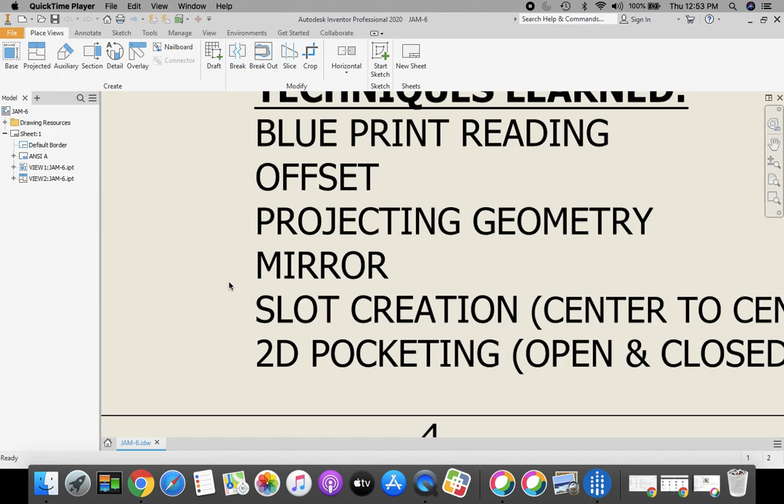out in front of it and a pocket in the middle. The thing that's going to be new for us is if you can kind of draw an imaginary line right down the middle of this part, can you see how the left side matches the right side? So we're going to introduce you to a new tool called Mirror. Also, something new for us is going to be this slot creation on how to create a slot. And all of that is talked about down here in our techniques that we're talking and learning about today.

We're also going to add projecting geometry in there. So to begin, we're going to start with a square that is 4 inches by 4 inches, and we're going to extrude it back 0.25. Let's go to Inventor.

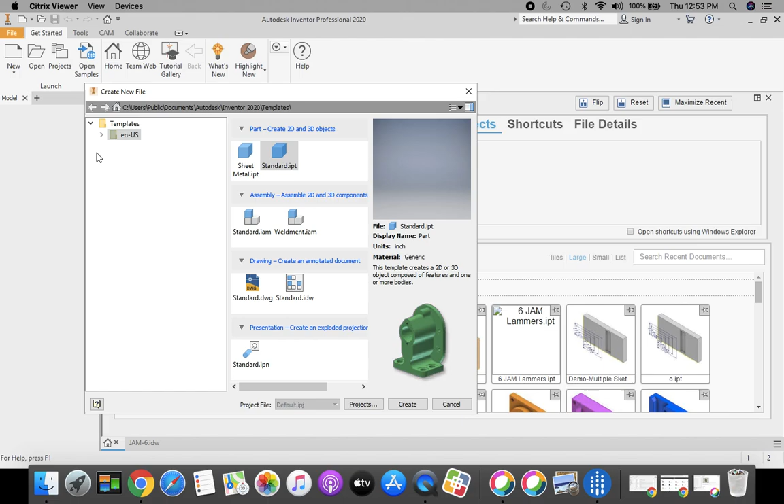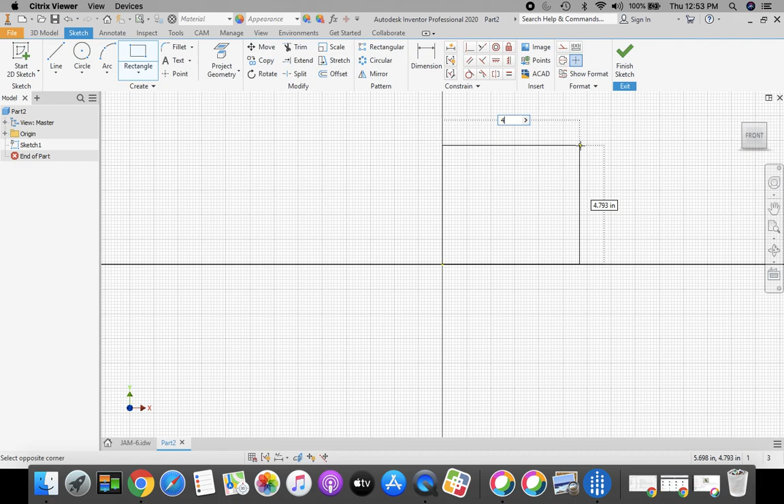Select New from the ribbon bar at the top, Standard IPT, and click Create. Take a 2D sketch, place it on our XY plane, click Front in your World View Cube to zoom all. Then we're going to choose our rectangle tool from the top, lock onto your origin, and sketch to the upper right hand quadrant. The horizontal dimension is 4, press the Tab key. The vertical dimension is 4, then press Enter on the keyboard. Green check mark, finish sketch.

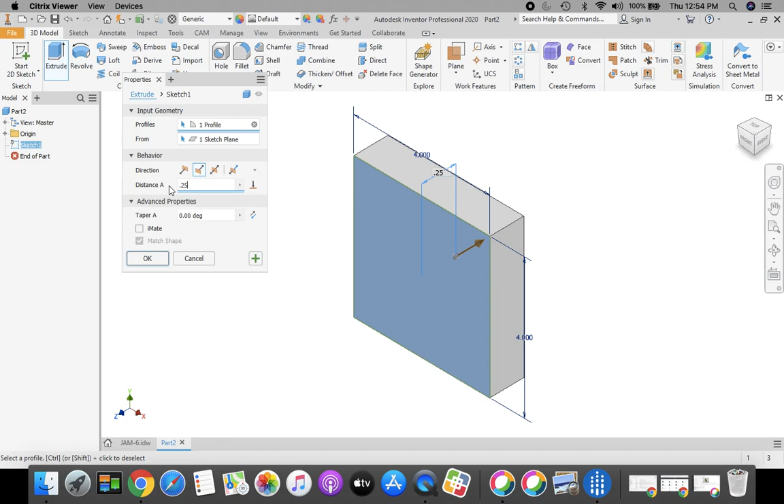Go home. And now we're going to take and extrude that 1/4 inch. We want that to go in direction 2, the flip direction. And we want to enter in 0.25 for my distance. And then select OK.

Wonderful. Next, let's take a look at our part. The first thing that we're going to do now for this triangle is we're going to take and make this angular line that goes from the midpoint of the square to the lower left-hand corner, and then we're going to mirror it over on the other side.

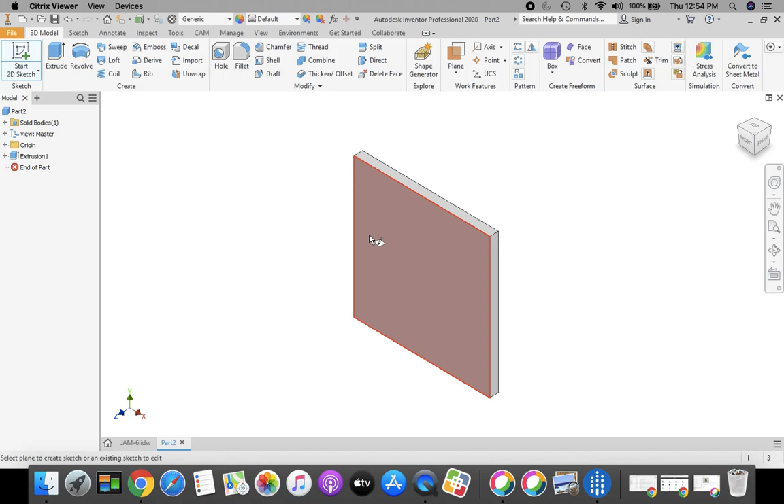So we're going to take a 2D sketch, place this on our front view. And in order to make this work, what we want to do is we're going to sketch some geometry on here. But first, we want to take and project the geometry from our square that's below this sketch onto this sketch.

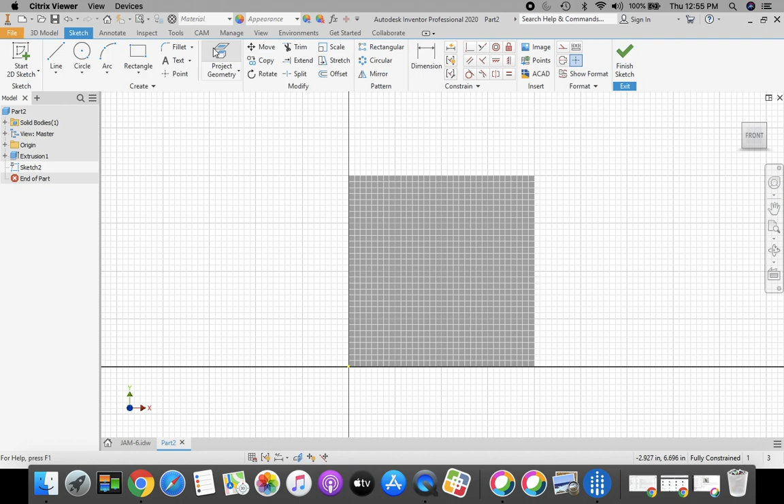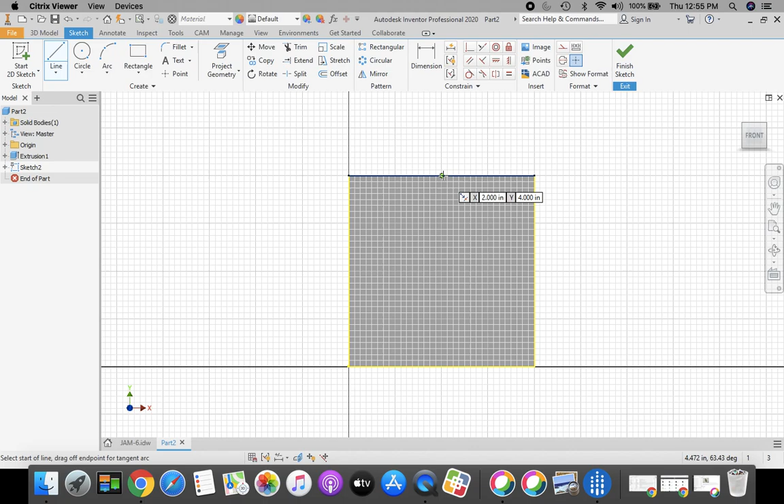So I'm going to click Project Geometry, and I want to select my part. When it turns red, click. And you can see that we did it right because it's now outlined in yellow. Then we're going to grab our line tool from the top ribbon bar, come up to the top of my part, and I want to slide my mouse along that top line, and when it locks on to the midpoint, you'll know it does because it turns into a green dot. Once it does, click, and then we're going to stretch a line to the bottom left-hand corner. Once you get a green dot down there, click to select.

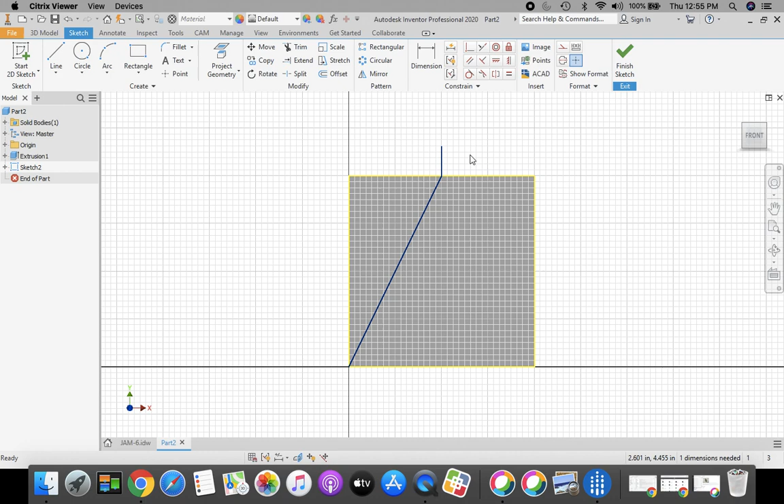Press the Escape key. The next thing that we need to do is we need to draw a construction line. So we're going to come back up to that midpoint at the top, click, make a line straight up in the air. Make sure that it's straight. The length of this line does not matter. Click, press Escape. So that's our construction line right there.

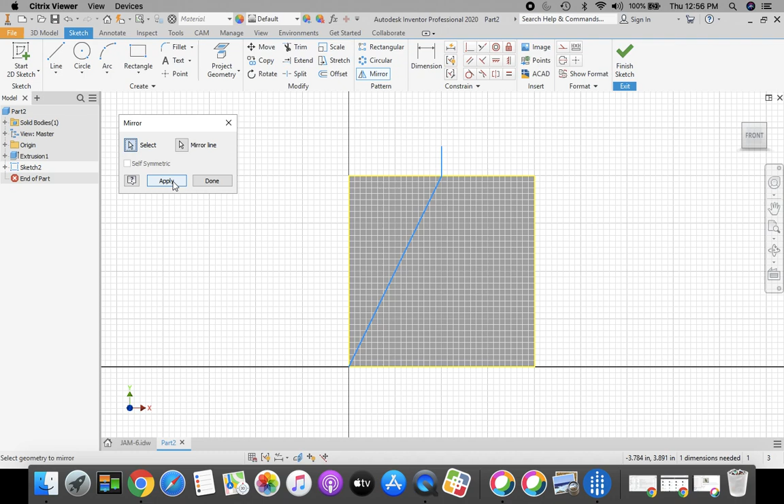Now we're going to select our Mirror command. It's right next to Dimension and below Rectangular and Circular Pattern. Right here, Mirror. The first thing it wants me to do is select what geometry I want to mirror, and I'm going to mirror this angular line. I'm going to switch over to my Mirror Line Pick tool, this one here, and it wants me to choose the line I want it to mirror around. So I'm going to select that construction line. Once I have done those two things, click Apply. And see how that flips it over there, nice and easy? Click Done.

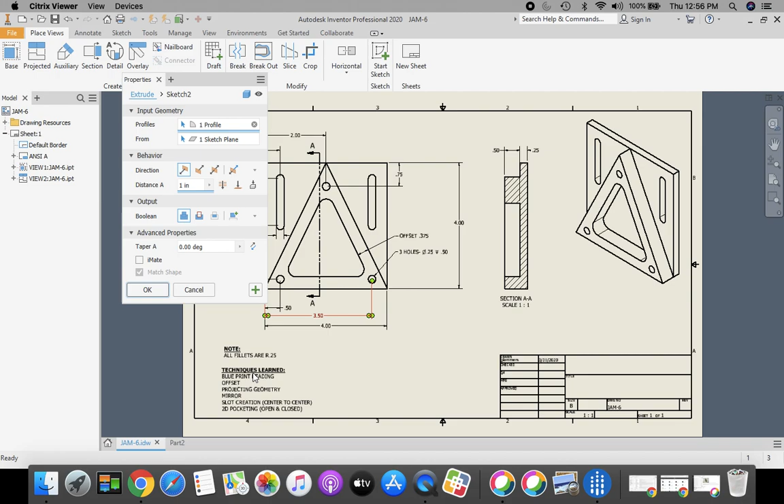Next, let's green check mark Finish Sketch. Go up to the top ribbon bar, we're going to extrude, and I want to select this middle triangle to extrude, and I'm going to take and extrude this a distance of, take a look at our drawing here, you can see that this area that's extruded is 0.5, a half inch. Going back to my part, I'm going to change my distance to 0.5 and click OK.

Next, what we're going to do is we're going to make this pocket in the middle that has these fillets in it at 0.25. You can see that in a note down here. Then we're going to drill these holes, and then we're going to talk about those slots.

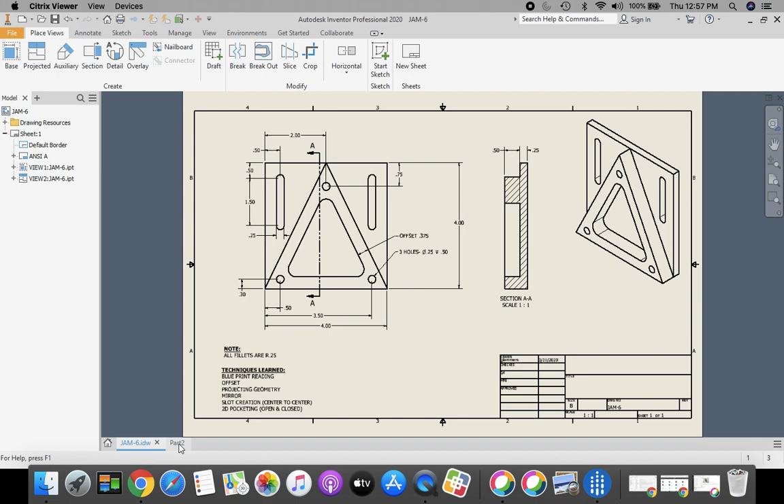The first thing I want to do is take a 2D sketch, place it on the top of my triangle, and go home.

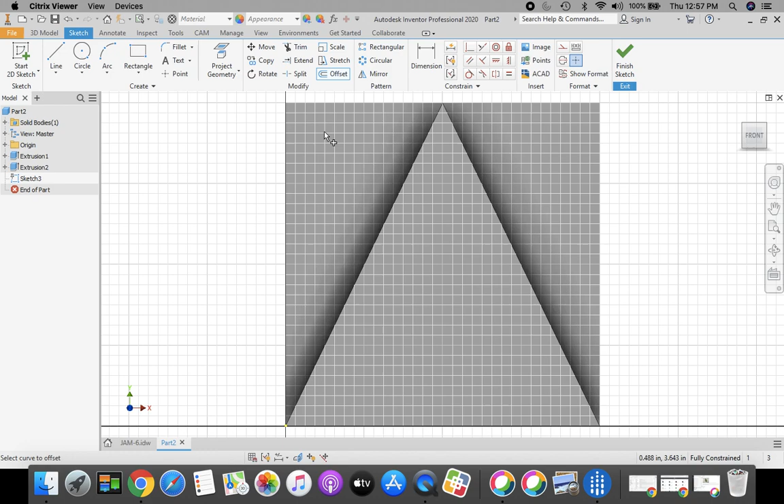Now I want to offset the outside edge of this triangle. However, when I click offset, do you see how nothing highlights? That's the same problem we were going to have with that midpoint in our first sketch. So what I want to do first is, instead of offset, project my geometry.

I'm going to come over and select my middle triangle, click, and now go to offset. When I click on the edge of that, you see how it all highlights red? Click and bring your cursor to the inside of your screen. This offset distance is 0.375, and press enter on the keyboard.

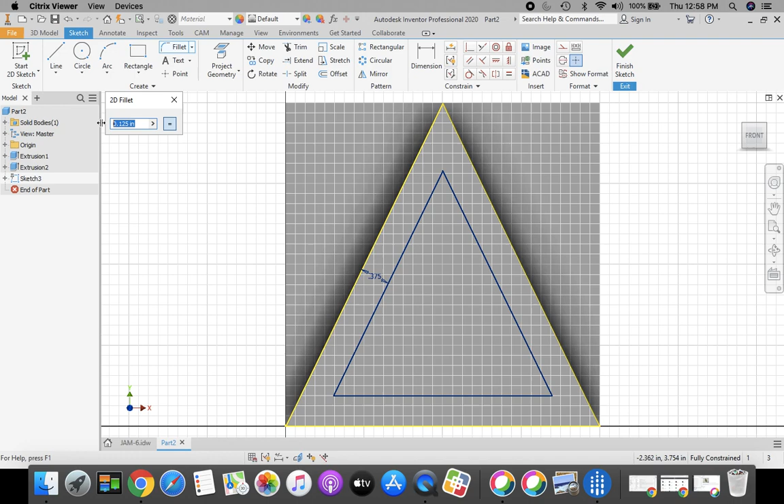The next thing that we need to add are those fillets. So we're going to come up to the top to our ribbon bar, select fillet. Our fillet radius is 0.25. Enter that in up here. And then we're going to fillet the top, the right, and the left corners of that triangle. When you're finished with that, X out of your fillet tool, and let's green check mark finish sketch.

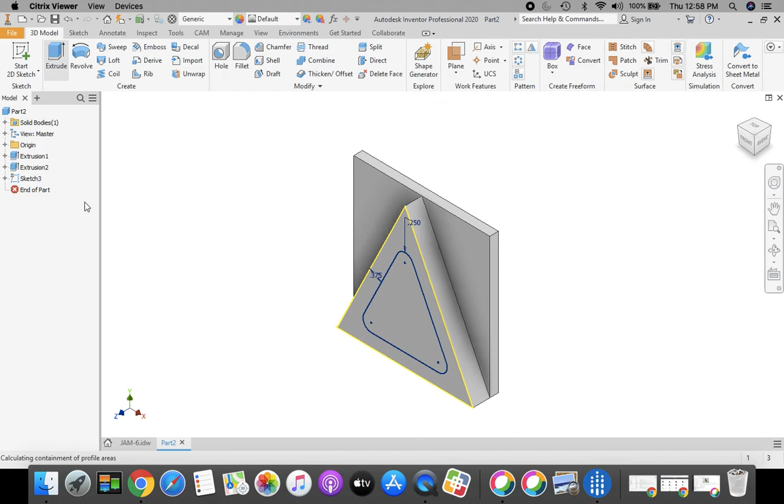Now we're going to take and extrude. I want to select that middle triangle that we just drew, and I want to extrude it, cut, and I want that distance to be a half inch, 0.5, and click OK.

Okay, next let's take a look at those holes. So those holes on the note here, it says that those holes are 0.25 in diameter and a half inch deep. And there's a few dimensions on here that we have to place in order to locate the position of those holes. So let's get started on that.

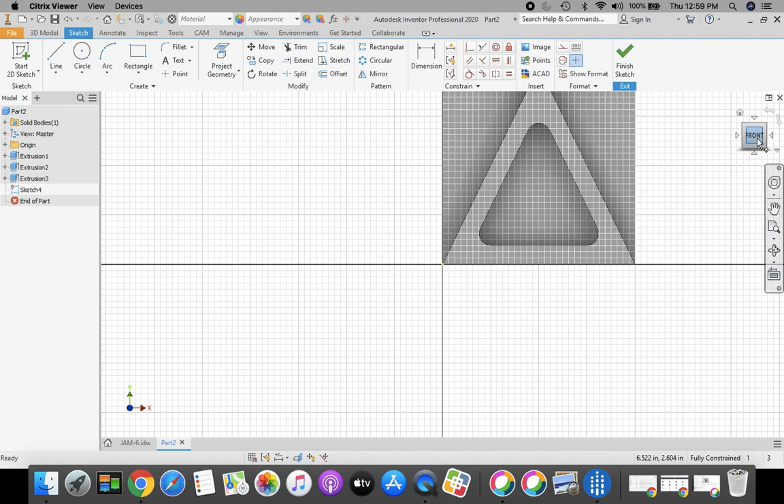I'm going to take my 2D sketch, place it on the top of my triangle. I'm going to click front in my world view cube, and I'm going to take my points, and place one just kind of randomly in each of the corners of the triangle. We're going to dimension them so it doesn't have to be perfect yet. Once you have those points on there, I click magnifying glass piece of paper to zoom all.

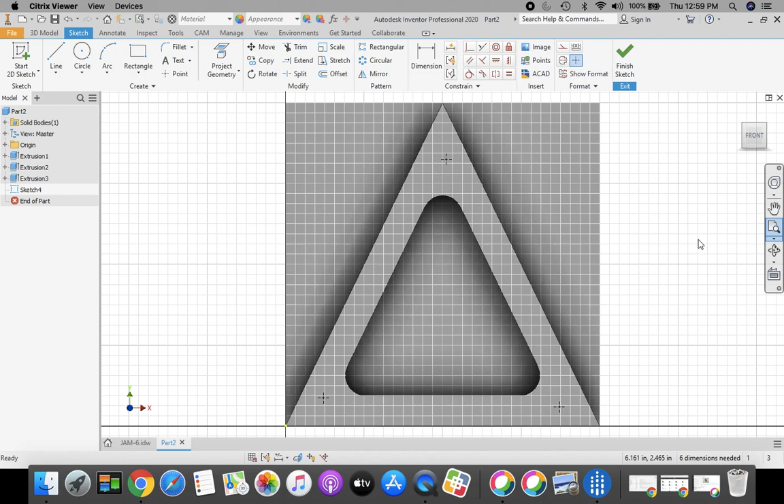I need to put some dimensions on here. So if I take a look at my drawing, from the bottom to that first point is 0.3. Enter that in for a dimension.

From the left-hand side to this first point is a half inch, 0.5. From the left-hand side to my second point, this is 3.5. Green check marker, enter on the keyboard.

Now instead of putting another dimension from here to the point, I could come up here to the top and constrain with my horizontal constraint, and I can constrain horizontally the left point and the right point, and it'll automatically line them up. That's a pretty handy tool. Remember using that earlier? Next, we're going to dimension.

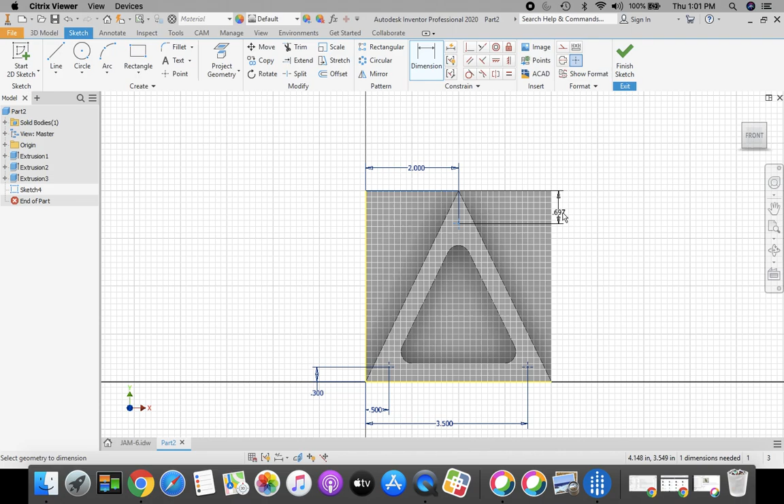Once again, we got a dimension for that top hole from the left-hand side to that point on the top, and this dimension is 2 inches. Then we're going to dimension from the top of my part to the bottom of that point, and that dimension is 0.75. Green check mark. Finish sketch.

Next, what we're going to do is use our hole tool. We're going to create holes for these parts, and I'm going to take you through top to bottom on here. We want to have a simple hole with no seat. We want to have a termination distance, so we're not going through all.

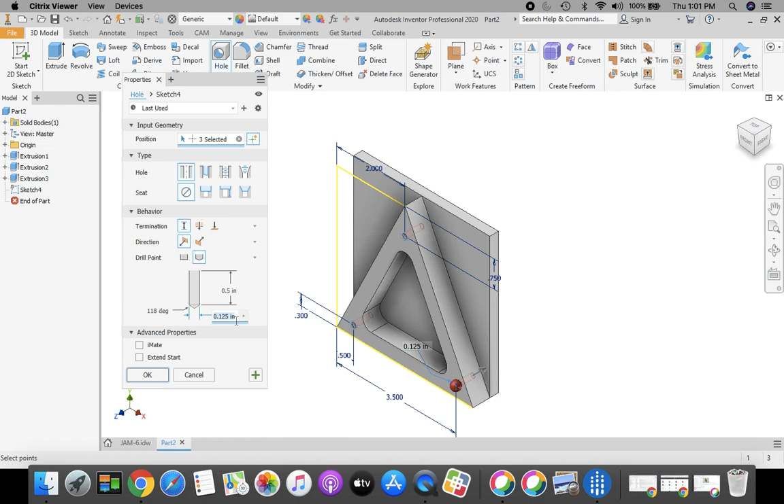We want termination distance. We want our depth here to be 0.5, and I want my diameter to be 0.25. And then select OK.

Great job, everything's looking good. Next, we're going to show you how to do these slots.

Now if you take a look here at my part, you can see that I have one slot dimensioned on this side. It's half an inch in from the top and from the left-hand side. From center of the slot to center of the slot, it is 1.5 inches, and it's a quarter inch wide. Let's show you how to create this.

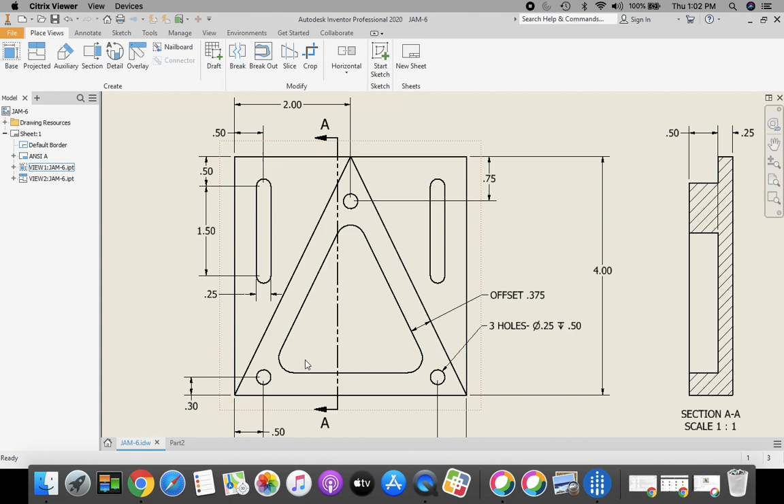I'm going to take a 2D sketch, place it on my left side view over here. I'm going to click front in my world view cube, or click the magnifying glass piece of paper to zoom.

Now if you look at the top in my ribbon bar, I don't see any slot tool. However, if you look at the buttons up here, underneath each icon for circle, arc, rectangle, there's a split button underneath there. We're going to click on the bottom of that where it says rectangle, slide down, and open up a bunch more tools. I'm going to choose slot center to center.

Once you choose slot center to center, we know the dimensions we need. I'm going to start towards the top of my part, click, and stretch out a line going down, and that is my center to center. So my center to center is 1.5. Press enter on the keyboard. Now it's going to force me to type in a distance for the width, and that width was 0.25. Once you've entered those in, press enter, and that's going to create our slot.

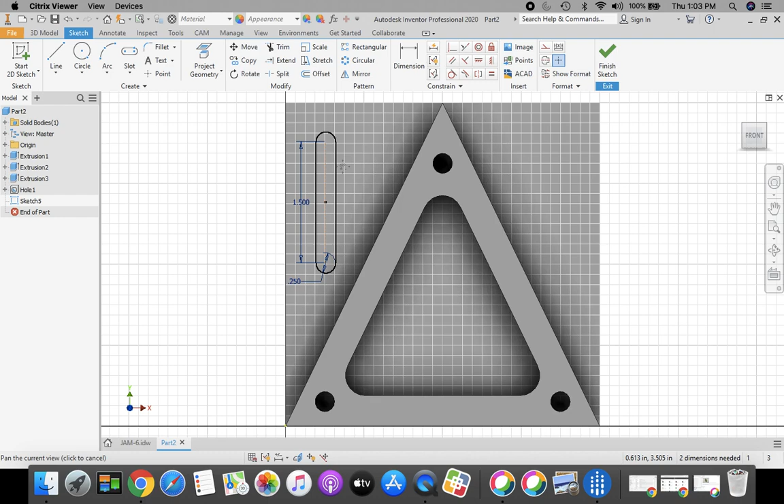Now we need to dimension that from the top down and the left side in. So we're going to use our dimension tool. We're going to dimension from the left side of our part to the center of that slot, and this is 0.5, a half inch. Enter on the keyboard or green check mark. We're also going to dimension from the top to the center of that slot. This dimension is 0.5. Enter on the keyboard or green check mark.

Now since we're still here, let's get a line tool. I want to come to my midpoint again — this is where we're going to mirror around. Get my midpoint, which turns green when I'm locked onto it. I'm going to sketch a straight line straight up. Once again, it doesn't matter how long this line is, just as long as it's straight.

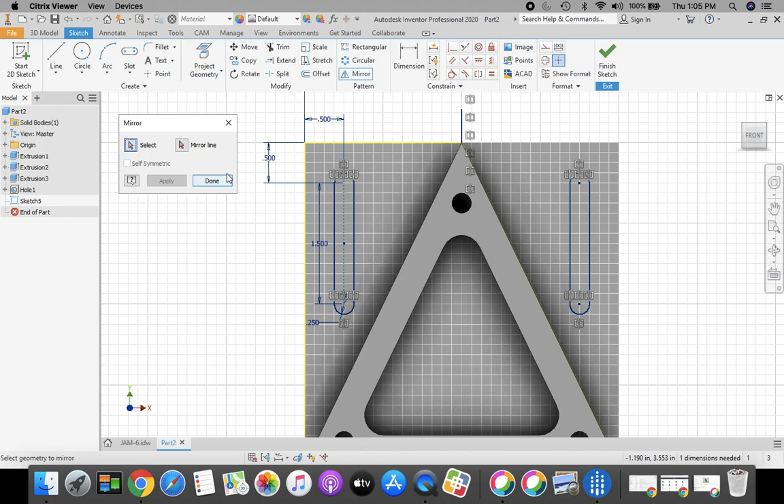Press the escape key. Now we're going to select our mirror tool again, and it wants me to select the geometry. So I want to click the top of my slot, the right side, the bottom, and the left side of that slot. Once those are selected, we're going to switch over to our mirror line pick tool, and I'm going to choose the construction line that we made. Once you're finished, click apply, and it's going to flip it over to the other side. Select done, and now we're going to click green check mark, finish sketch.

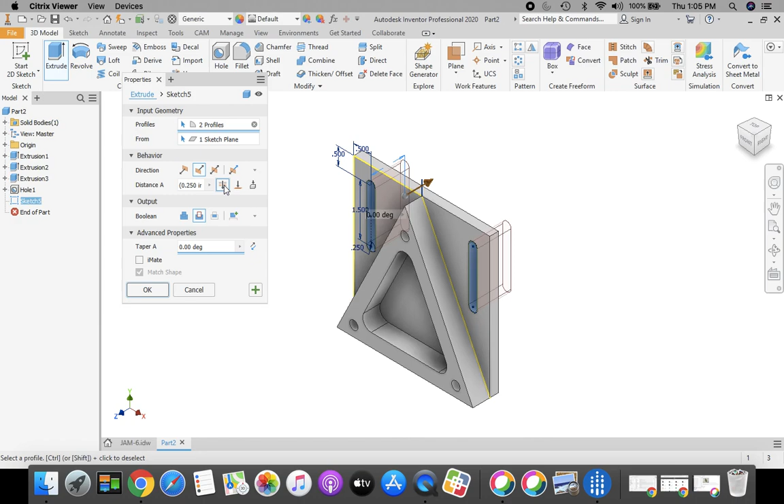Now we're going to extrude those. We're going to click both of these slots here — make sure you're identifying both of them by clicking them. We want it to go in as a cut, so my output is going to be cut, and I want to change this to through all for my distance. Once you're finished with that, click OK. And there you have Jam 6 part done.

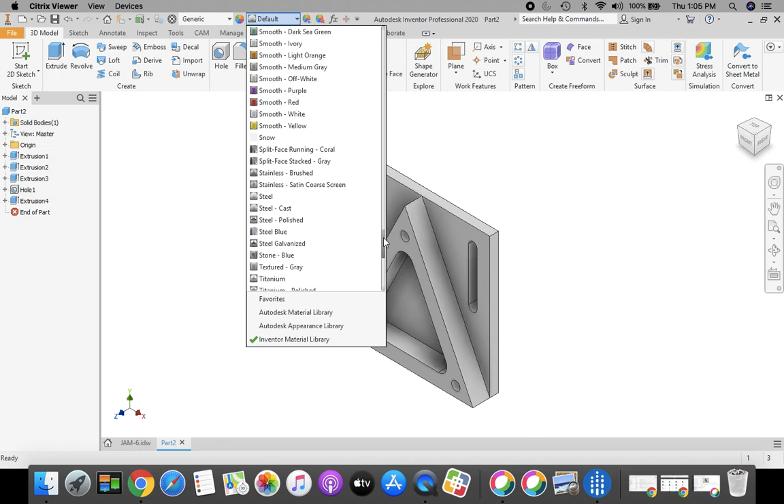The last thing we're going to do is come up to the top to where it says default. I'm going to scroll down and find the T's, and I'm going to make this one turquoise. Okay, that looks really good.

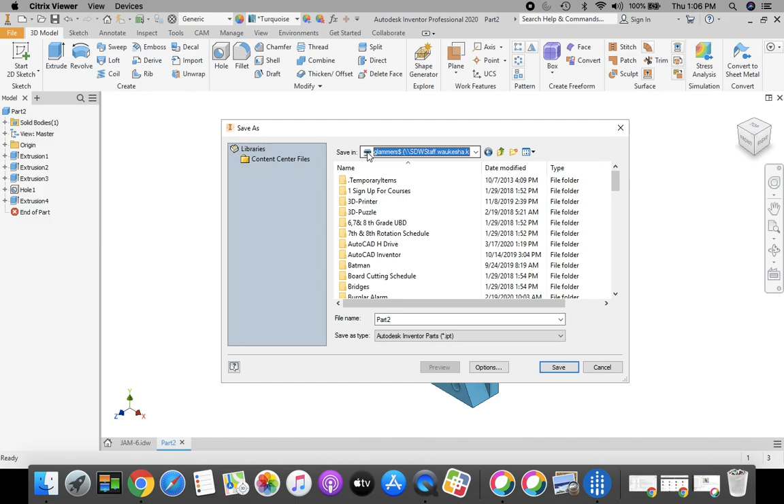Let's go up to the top orange file in the top left-hand corner, and we're going to go down to Save As. We're going to make sure this is going into our H drive, from the pull-down menu all the way to the bottom: first initial, last name, 000, and the gray box with the green line underneath of it. We're going to label this part 6 Jam, and you're going to enter your last name right here after that. Once you've done that, click Save.

Congratulations. The next step is to go on and run the tool paths in order to cut this on a CNC mill. Great job on part 6.